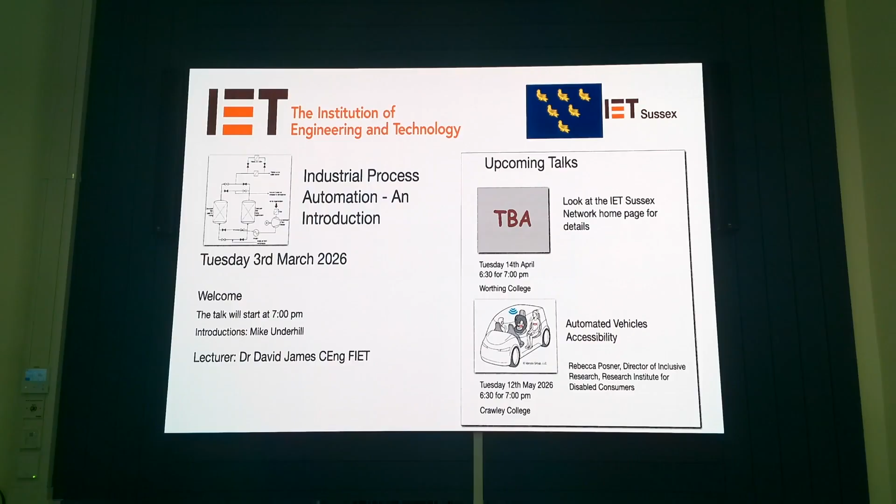My background wasn't quite as Mike described. As a physicist, I started my career working on the design of nuclear reactors for submarines. But every 2 years, the MOD changed their mind and cancelled the contract, and so we started on something fresh. So eventually I thought I'll go and work on the design of civil power stations, which I did. And after 2 years, you can guess what happened. The contract was cancelled, and we were about to start on something new. So that's when I moved into the area of industrial process control.

I've added to it a lot since then, but I'm afraid I chose this particular style of the book for that audience, and when I came to try and change it, it messed everything up. So I'm afraid you're going to have to put up with the page turning. It's just too complicated to change.

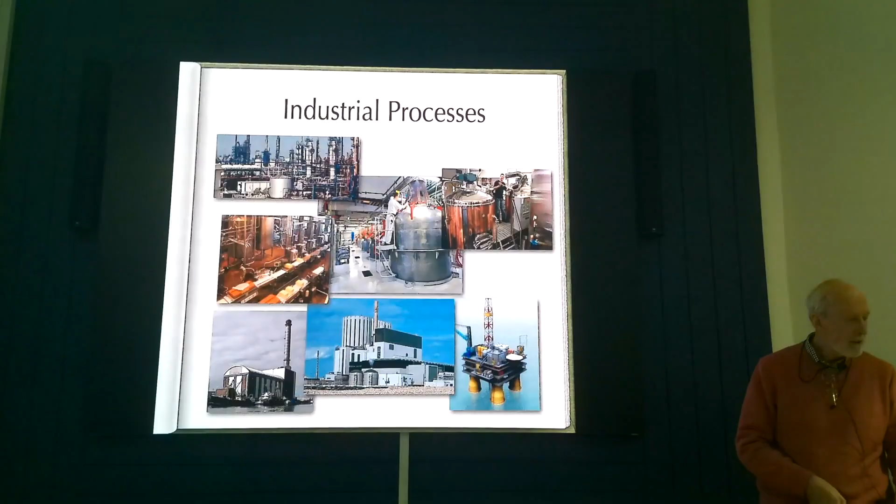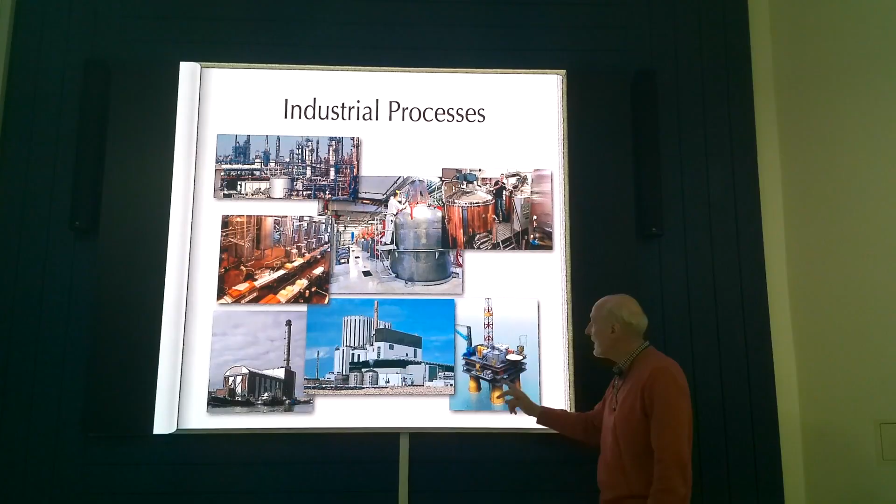Okay, industrial processes. Well, here we have a few. The red pointer is too small, I can't see it. But up the top there we have a refinery. This is a cheese manufacturing plant. That's a pharmaceutical plant, a brewery. Sometimes you do some quite useful or interesting projects. That's Shoreham Power Station, so that's a combined cycle gas turbine. That's a nuclear power station and obviously an offshore oil rig. They're all examples of industrial processes, but they basically fall into two classes.

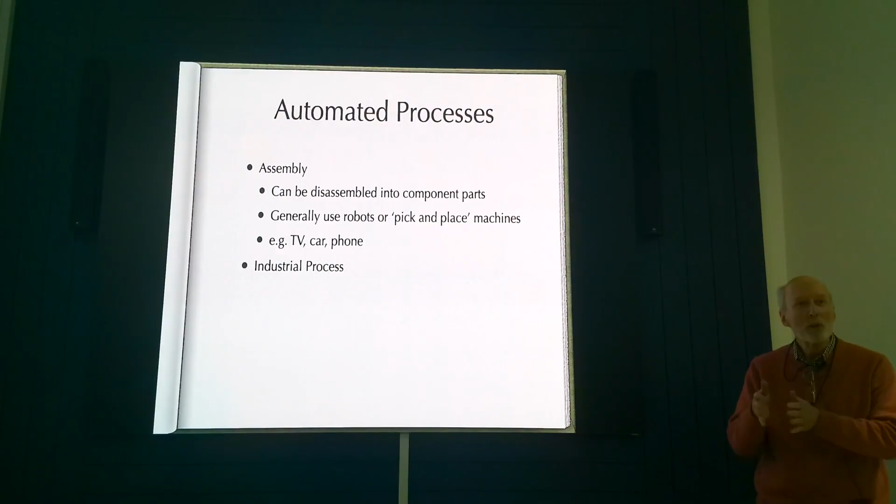There's what I've called assembly and an industrial process. So I just want to make it clear that an assembly is something that really can be disassembled. So if you think of a car or a phone, now, I know there's welding and there's glue and all sorts of things that make it difficult to take them apart, but in principle, the various components keep their sort of identity. And often robotics are used, particularly in the electronics manufacturing and other things.

An industrial process, however, can't easily be undone. Now, I know that making petrol in a refinery is really just breaking apart the various molecules that are already in there, and in principle they could be put back together. But what you do with all the additives and so on, I don't know.

Processes in an industrial sense tend to be fluids and powders that are piped around and mixed and react. So you've got chemical reactions, blending, separation processes, and so on. And there are a number of things, like almost everything we have here. These seats were the basic plastic before the moulding, and it was made in one of these processes. Similarly, medicines, petrol, and chemicals. So we've got those two different types, and it's the latter that we're going to concentrate on.

And just two examples of these processes. They generally break down into two types. There are the continuous processes, so they have a constant feed of material, and they really aim to maintain a steady state. Refineries are a good example. They want crude oil flowing through constantly. The only time they'll change is if they get a different source of material, a different type of oil, one that's heavier or lighter or has more sulfur or whatever, and they'll want to change the parameters. But generally, they want to keep it as steady and as efficient as possible.

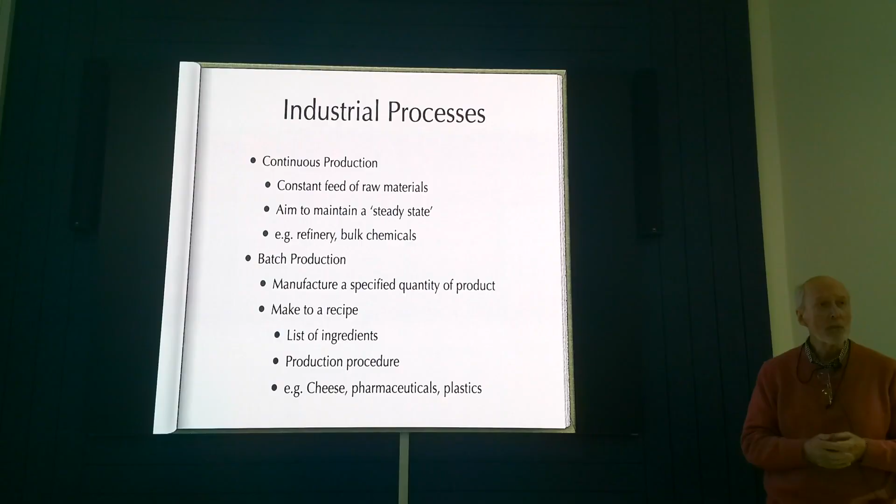And then there's batch processing, and that really is manufacturing a quantity of material, and usually requires a recipe with a list of ingredients and some production procedure. So cheese, for example, pharmaceuticals, the plastics, they're all batch processes, and there are quite different requirements for the two types of process plants.

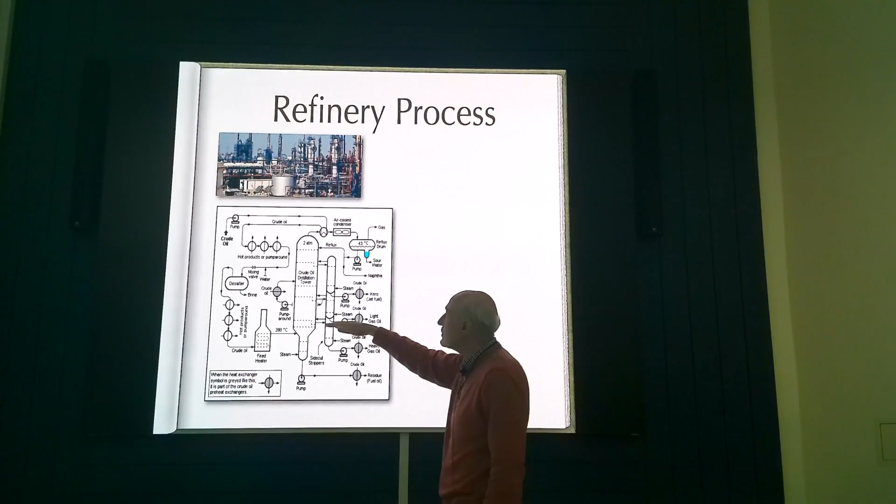If we take the refinery process as an example, you're probably all aware, it's a distillation column. Crude oil comes in, is processed in various ways. Steam comes in to heat it. And then the different fractions, different molecules that are within the crude oil, condense out at different temperatures. And so a whole set of grids allow the different materials to be taken off. And as I said, that's a continuous process with a constant feed of oil.

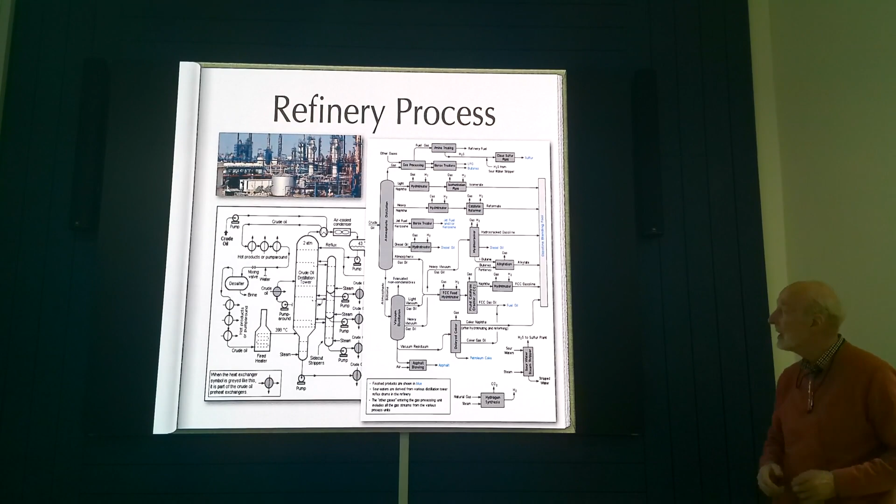A refinery process is just another example, just really to point out that in a refinery, there's lots of other bits and pieces, and not just the column. The column may be the most difficult part to control, but there's a whole load of other ancillary equipment that's required in the system.

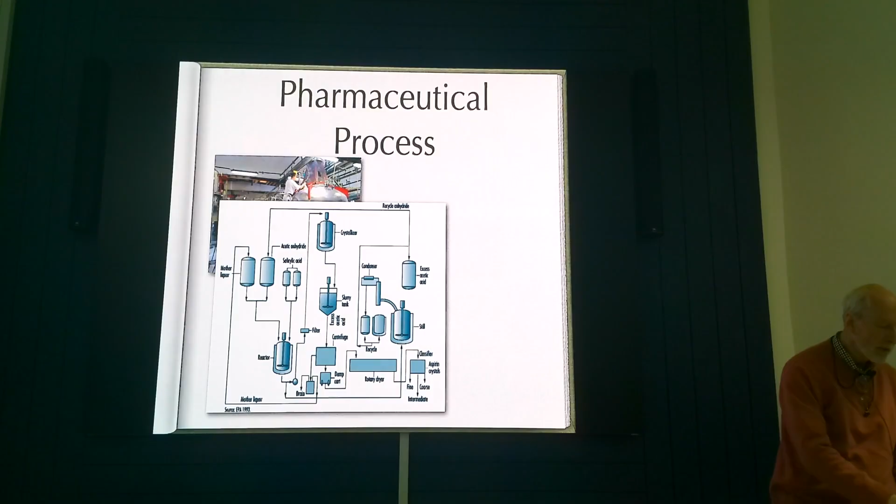That reactor, of course, is not just a vessel. It has, as we said, an agitator, but it's got steam and cooling water, nitrogen feed, because often materials need to be processed in an inert environment, particularly where there's the possibility of some electrical sparks, and various other valves and pumps associated with the vessel. So each of the vessels that are in a basic schematic then have much more detail associated with them.

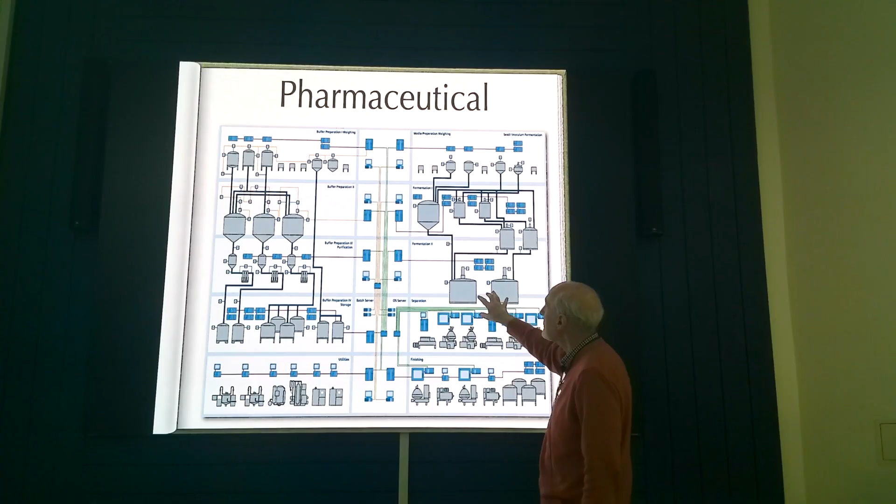And just as an example again of something a little more complex, here we have another pharmaceutical plant. There's 3 reactors in parallel, all being fed by the same set of tanks, and the materials then coming again through other equipment. This is the fermentation process. So they can become quite complicated. One recipe of a product can be used multiple times and running in parallel. So you often have parallel trains that all need to be managed.

So hopefully that's just given you a flavour of the types of industrial process, at least what I am referring to as an industrial process, and the sort of automation systems, therefore, that we're going to be talking about.

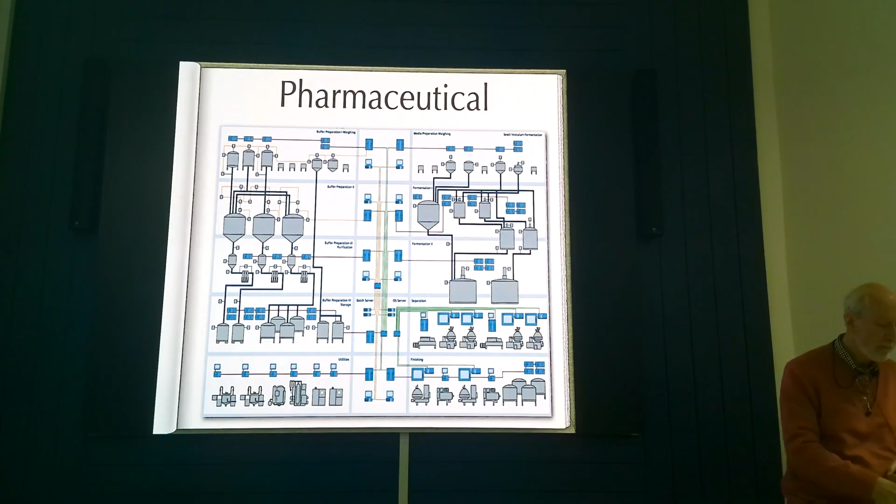To put all that together, there's a number of disciplines that are going to be involved. Now, I'm going to ignore things like architects and civil engineers who are going to build the buildings. I'm going to ignore the operations people who are making the product and the maintenance people who are going to keep the plant running. But to actually define and realize that plant, it usually starts with chemical engineers who will scale up lab scale experiments. They know the basic chemistry, but now they have to make it work for large quantities of material.

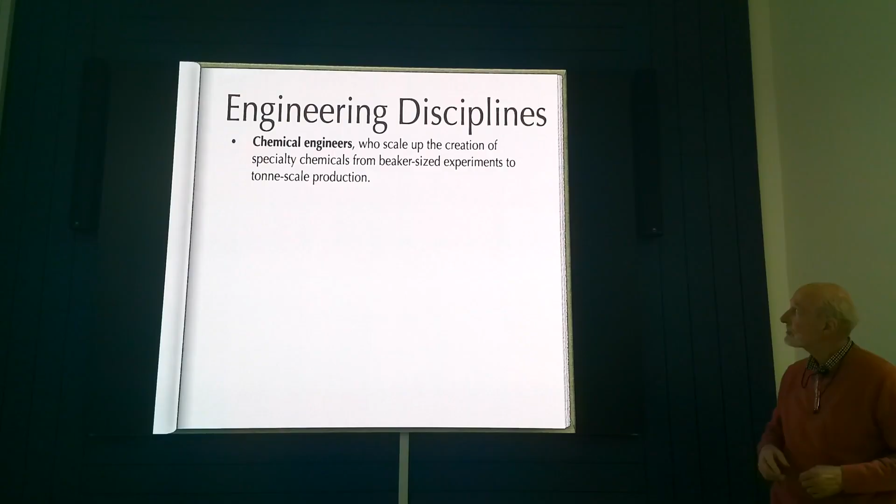There are then, of course, the process engineers, and they will start to say, okay, we have these requirements of the materials and what reactions we have to put in place. But now they look at the plant in a general form and do the basic top-level design, working out what vessels are required, what sort of functionality is required of those vessels, and providing that, as I said, that top-level design.

Mechanical engineers will come along and they'll design the more detailed arrangement. So they'll decide what materials are actually needed for that particular product. They'll decide where the pipes are going to run, how it's all going to be laid out, the physical structure of the system.

And the instrument engineers: we've got all these pipes and tanks and pumps and motors, but we need to measure lots of things. So all the instrumentation that's going to be required is sorted out by the instrument engineer. And of course, there's a sort of iterative process here. It doesn't all happen in steps.

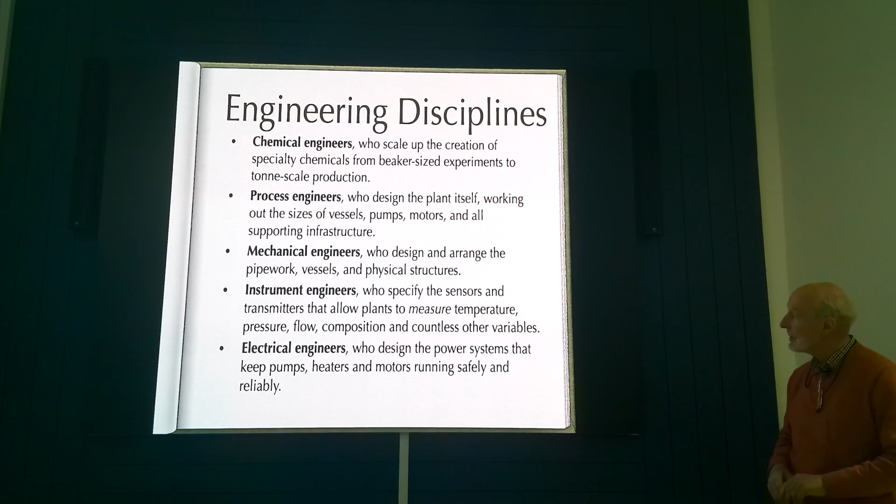But all that information, together with the one I'd forgotten, the electrical engineers, who are going to now work out, well, how are we going to power all these various things? Where are all the cables going to run? How do we make it a productive plant? And the information generated by these people is what's required by the automation engineer.

It would be nice if all these things happened and they were 100% complete before the automation team come in. That, of course, never happens. On the one hand, people try to do as much as they can in parallel. So from early information, they'll start developing the other systems that are going to be implemented.

And of course, there are always changes. People decide that, well, actually, we need another vessel here because we're not going to get the throughput. So they add in another one. We're not going to use on-off pumps, we're going to use variable speed pumps. Changes happen all the way through the process, and everyone involved there has to adapt and change what they've done.

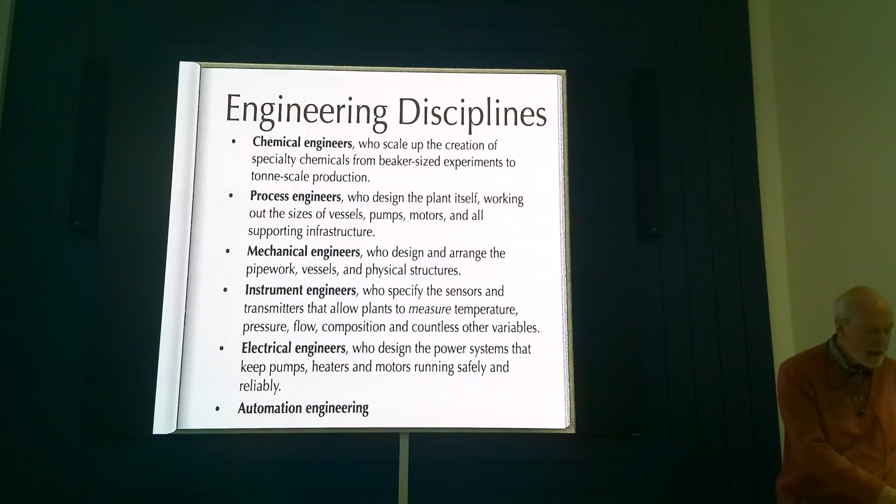Now, of course, all these people then provide a set of information that I've referred to as client data. So a process flow diagram, that's what a process engineer will produce. This is high level. So he's got a couple of tanks, he's got some valves. These are symbols that are used for valves. There's a heater, there's a compressor there, some filters at the top. So at top level, how the plant is structured and how it's going to be connected and how material is going to flow.

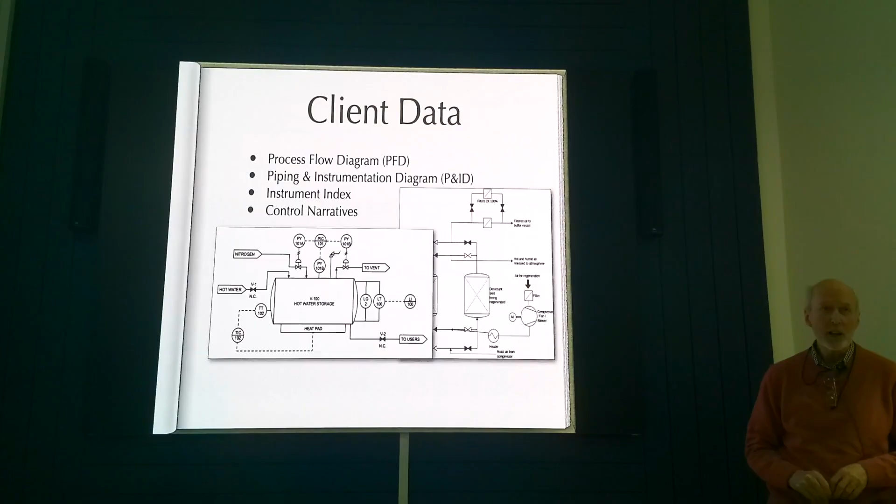The mechanical engineer and the instrument engineer are going to produce what's called a P&ID, a piping and instrumentation diagram. So now we're starting to get more detail. So we take one vessel, in this case just a tank, but now we have temperature measurements and temperature control. We have level transmitter and level indication, and so on. So they define all of the details of the instrumentation that's going to be on the plant.

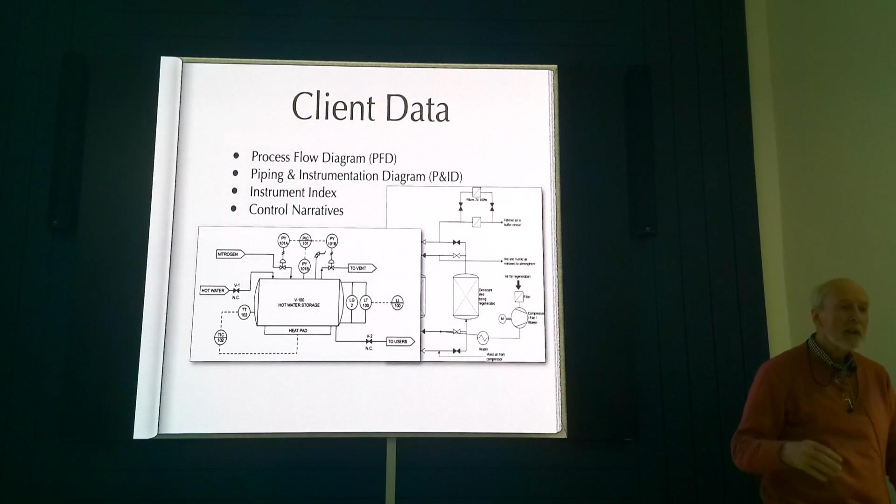There are also things that other people need. For example, for each pipe, it will say how angled it is from the horizontal, if some natural flow is required. The instrument engineer will also produce what's generally referred to as an instrument index. And basically for every transmitter, every valve, every device that's on the plant, they'll produce a database giving its reference number, its name, the type of device it is, its range, various parameters associated with it.

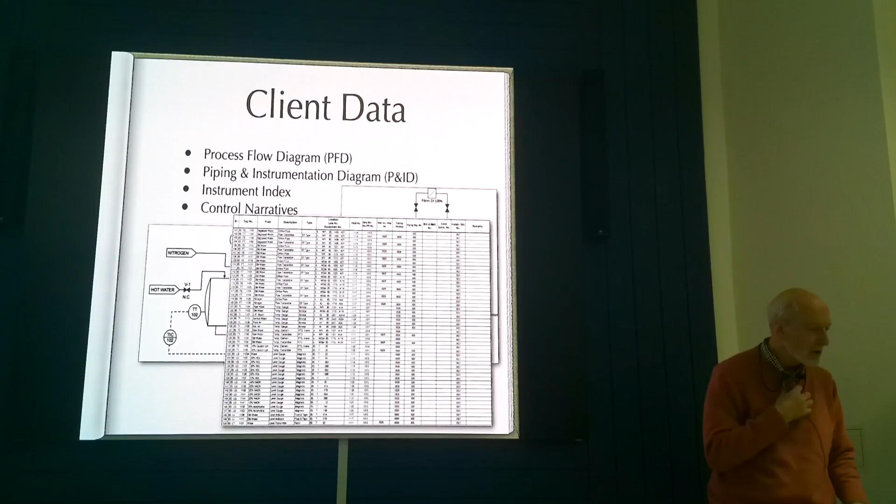So that when all this information is put together, together with some control narratives, which again are developed by the process engineers and the instrument engineers, then there's enough information for the automation system to be defined and implemented.

I thought it worthwhile just to put some of the acronyms up. I may use some, I may not, but you often find these. SCADA, the Supervisory Control and Data Acquisition. I guess they started when you had oil fields distributed around the desert. You needed to collect information from each wellhead, bring it back to a central point, and allow operators to view it and possibly change things.

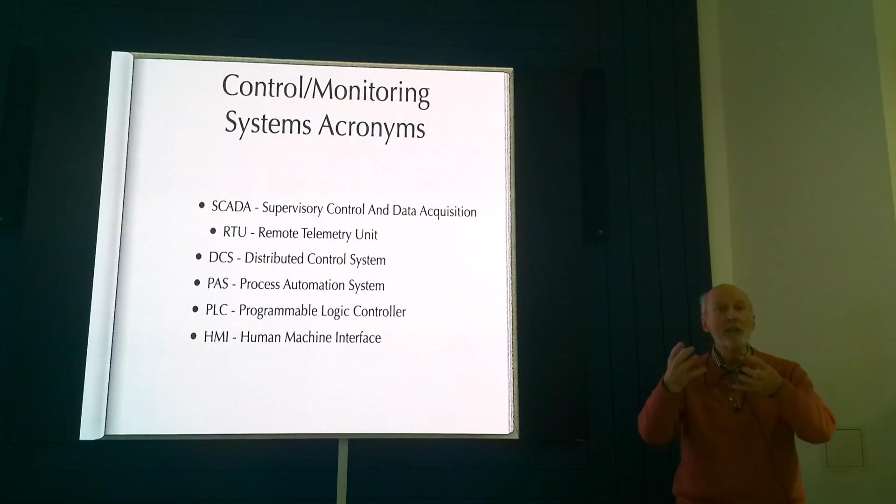So they have these remote telemetry units, just some electronics to read the analog and digital inputs, to drive some digital outputs, and then communicate over some sort of network to bring it all back to a central database and allow the operators to view that.

Distributed control systems are a tighter sort of system. Controllers based around the plants, again reading those input signals, sending output signals, and all communicating with each other. Remember, the RTUs are only communicating back to the SCADA database. So the distributed control system now is providing control across the board, and again providing data for analysis and a view by the operator.

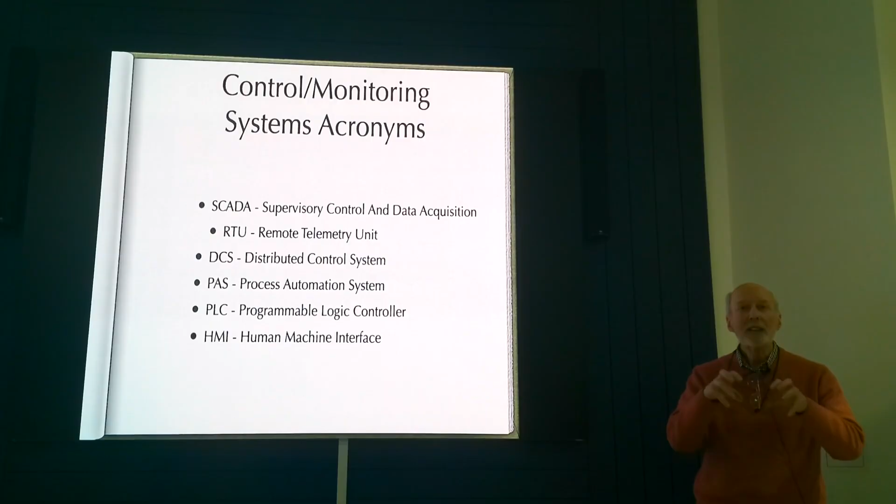A process automation system is an oddball, really. It's sort of rather like a distributed control system, but generally made up of more standard individual blocks that can be put together, often using devices that could be used in their own right, on their own, but now integrated into a system.

Programmable logic controllers - I don't know whether any of you have come across relay logic in your work somewhere, but the PLC was designed really to replace relay logic. Rather than have lots of relays all wired up so that if a push button's pressed, then various things happen, or if some alarm is produced from some part of the plant, then actions can be taken. Basically, they produced a system that would provide an electronic relay logic system.

These days, they're actually used more extensively, whereas it started off really just looking at a replacement for relay logic. Nowadays, a lot of people use them as the basic controller for a control system. And of course, human-machine interface - they all require some means of accessing or providing access to the information by operators and by engineers.

Okay, well, what I really want to do now is just talk about those sensors and actuators. The sensors are measuring things - temperature, flow, pressure, whatever. And the actuators are pieces of equipment on the plant that are going to change things - pumps, motors, valves, and so on. And in the middle, of course, you've got a control system that's going to read the inputs, make some decisions and drive the outputs.

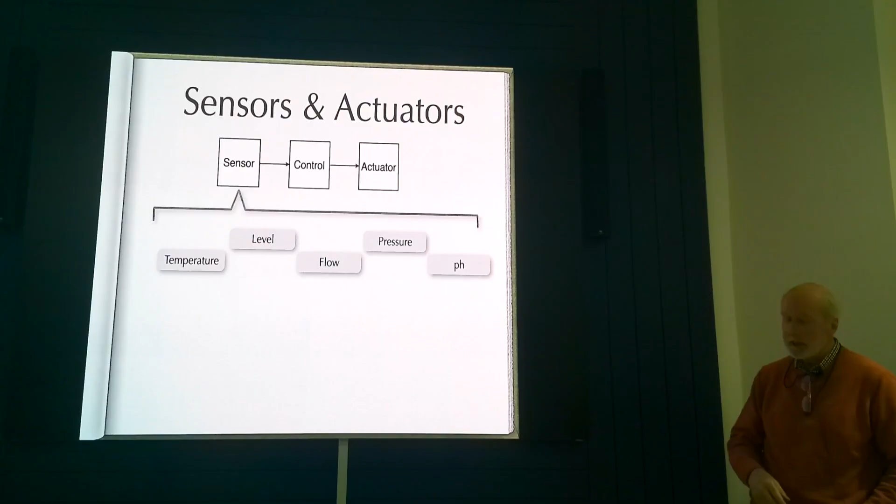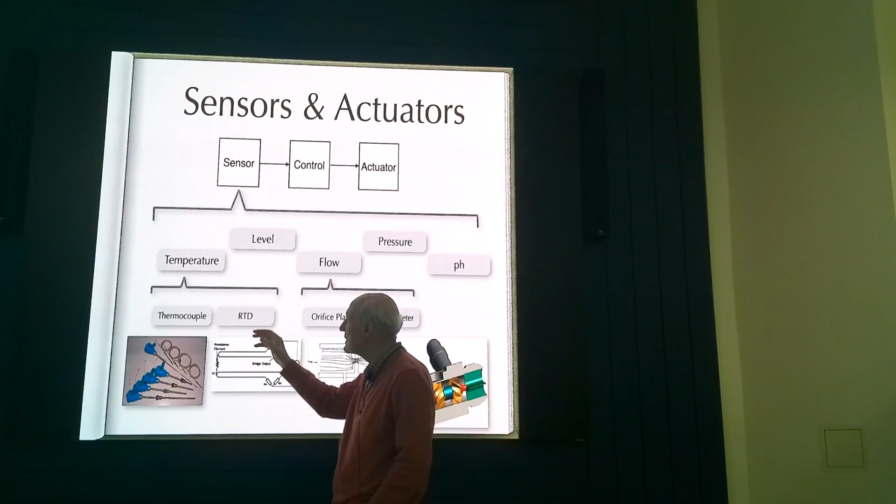Typically, the sensors cover - well, that's just an example. There are other types of measurements that take place as well. But if we look at temperature, for example, then usually, most commonly, it's either thermocouples or resistance thermometers. Thermocouples, as I'm sure you're aware, are two different bits of metal. They produce a small voltage depending upon temperature, and that small voltage can be measured and give an indication of temperature. Resistance thermometers - you could all think back to our Wheatstone bridges when we did A-level physics or whatever, but it's that sort of idea. A wire with resistance changes its resistance with temperature, so you can use that to measure it.

When we look at flow, two major types, although again there are others. If you pass fluid through a small hole, you get a pressure differential across there. If you measure that pressure differential and take the square root, it's proportional to the flow that's going through it, which is quite handy because they're often used then for measuring the flow of various materials. A more complicated item is a turbine meter, so it's rotating and you count the number of times it goes round to give a view of how much is flowing through. And some of these can be really accurate.

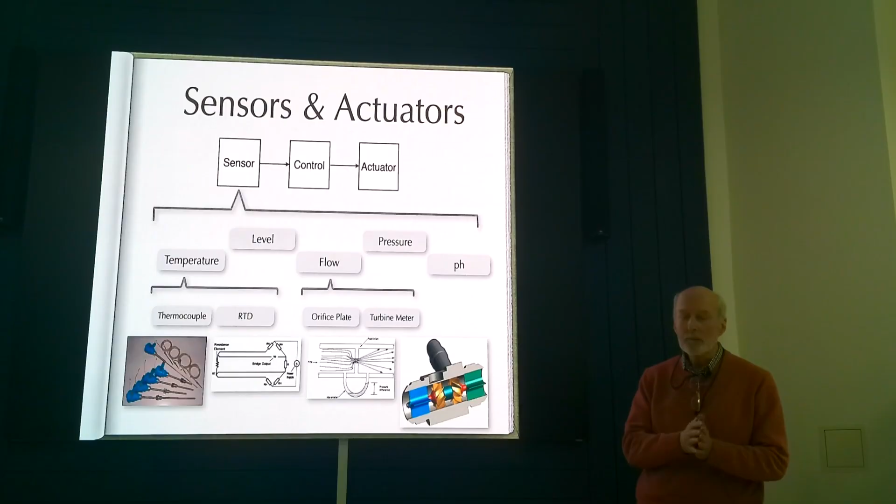Coming back to the oil field, I suppose wherever tax is going to be paid, they have to measure the amount of product that's produced very accurately. And great lengths are taken to have highly calibrated meters and controllers and test the flow meters periodically. There are other flow meters, for example, a positive displacement meter - fill up a volume and then empty it. Count how many volumes you fill up, that's how much fluid has gone past.

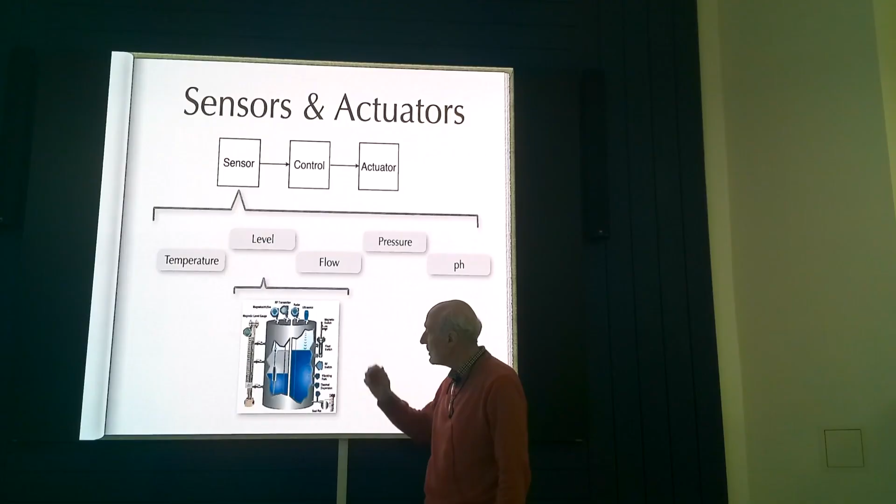If we look at one of the other types, level, as an example, there's a whole host of things. I mean, from a simple sight glass along the side, where an operator can go and look, to radar systems, to systems that go up and down and detect when they reach the surface. There's ultrasonics and various switches to show that the fluid has reached certain levels. So depending upon the application, there's a lot of choice for people as to what they can use for level transmitters.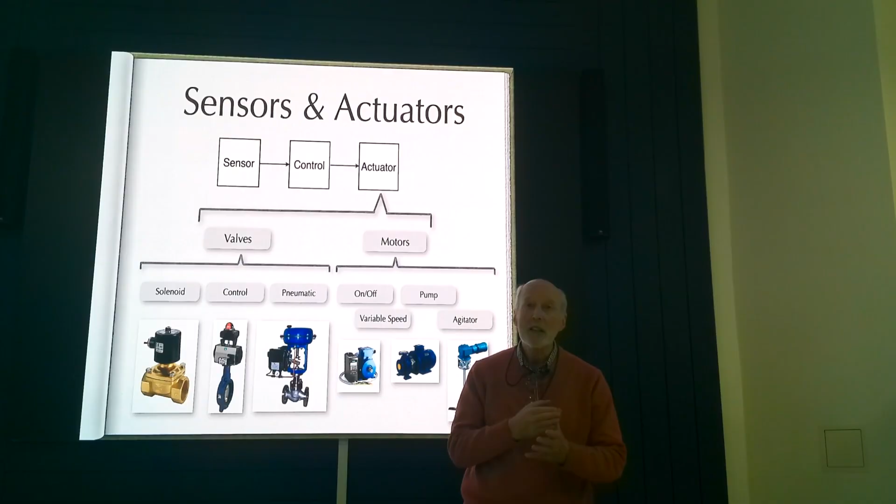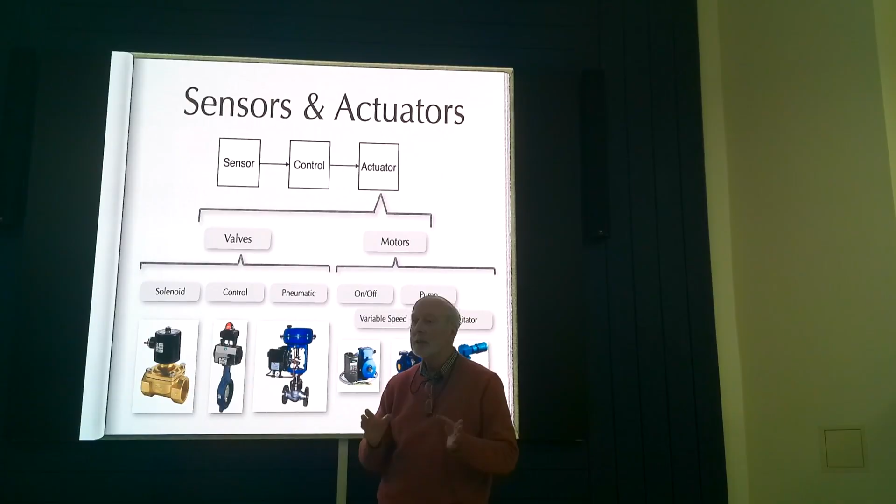With pumps, it's a similar sort of idea. You've got on-off pumps and variable speed pumps and a whole range of different types. Similarly, motors drive agitators or fans or whatever. So there's a whole collection of actuators that are used on the plant.

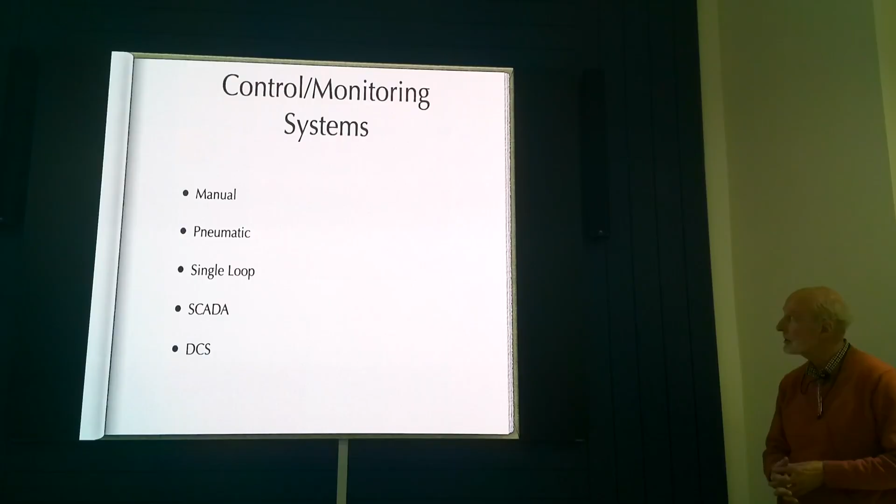Now to that box in the middle that's going to read those inputs and drive the outputs, you've got various types of control systems. Manual, of course - a man sat there turning the wheel and moving it. That was done for a long time. In fact, you may remember people talking of walking the panel. They'd walk up and down, looking at the gauges and the dials, and twiddle things as they went.

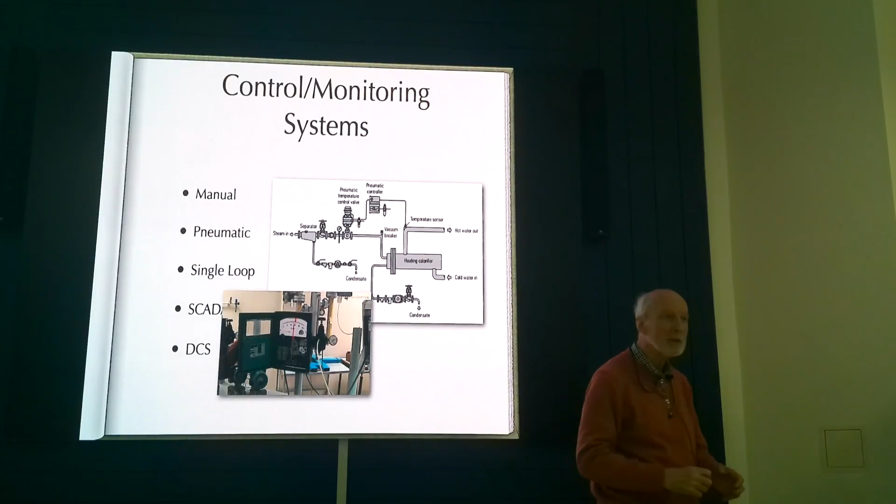Pneumatic systems - I've never actually worked on a pneumatic control system, but as well as having the pneumatics to drive the valves and so on, you can get controllers that allow you to do various things with the pneumatic system. You probably know more about those than I do.

If we look now at a single loop control, let's go back to something very simple: a tank with a temperature indicator and a valve that changes whatever we're passing through the jacket around the vessel, and a temperature indicating controller. That is a loop. We give the controller a set point, say we want the temperature to be this amount, and it measures it, looks for any error, opens or closes the valve to regulate the temperature of the jacket around it. That's single loop control, and probably 90%, perhaps more, of control on process plants is just single loop controls.

I'll talk a bit more about that in just a moment. They often get put into boxes that can be put onto panels. It just deals with that single loop, or some of them have multiple loops or multiple single loops.

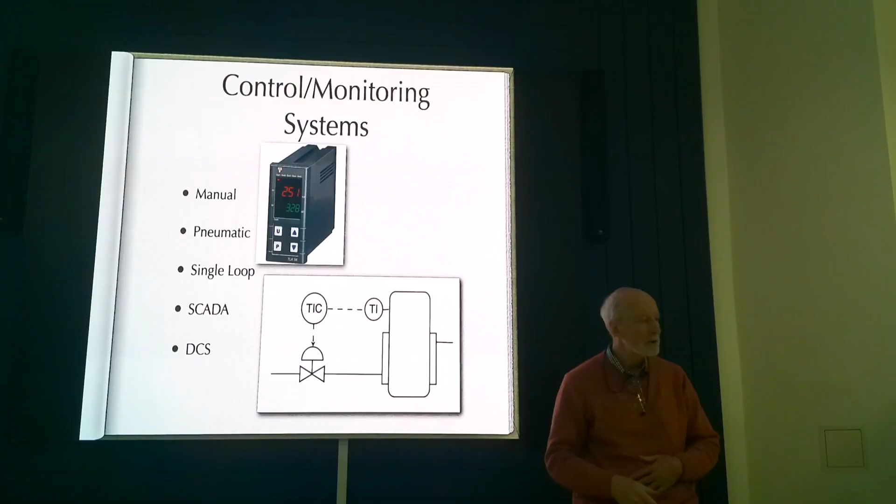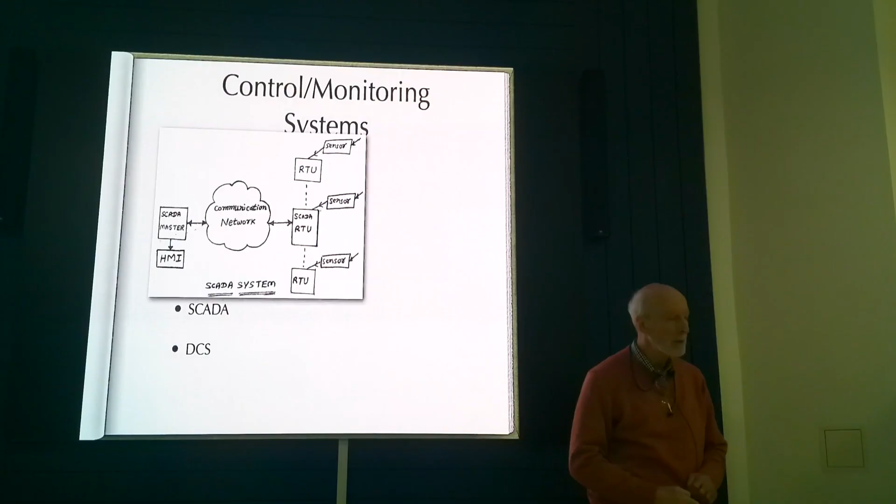We mentioned the SCADA system, this collection of remote telemetry units reading sensors and using some sort of communications network to send the signal back to the SCADA master and thus the HMI that the operators are going to use. A typical system might have these remote stations, these RTUs, using a communications network, which can vary - just a dial-up modem, a radio system, or hardwired cables. From some of the offshore platforms in the North Sea, they use tropospheric scatter to get signals back to shore. But then there's some device controlling the network, and a number of servers for the database and operator interfaces, and possibly some link into wider networks.

A typical signal from analogues, like a temperature or a pressure, will be a 4 to 20 milliamp signal. They've been used for years. It's 4 to 20 so that if it drops below 4, you know there's a problem - the wire's been cut or something. So that's been a standard for a long time.

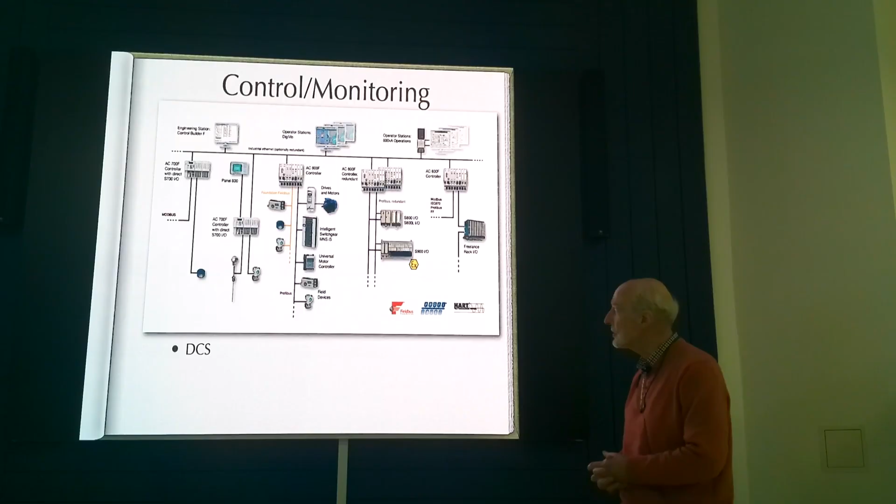These days it's tending to be supplanted with communication systems, so you hang all the devices off a communications bus, or a number of different buses, and do digital communication rather than the analog 4 to 20. But the communication system that's connected to all the controllers will also have other operator stations and database systems associated with it.

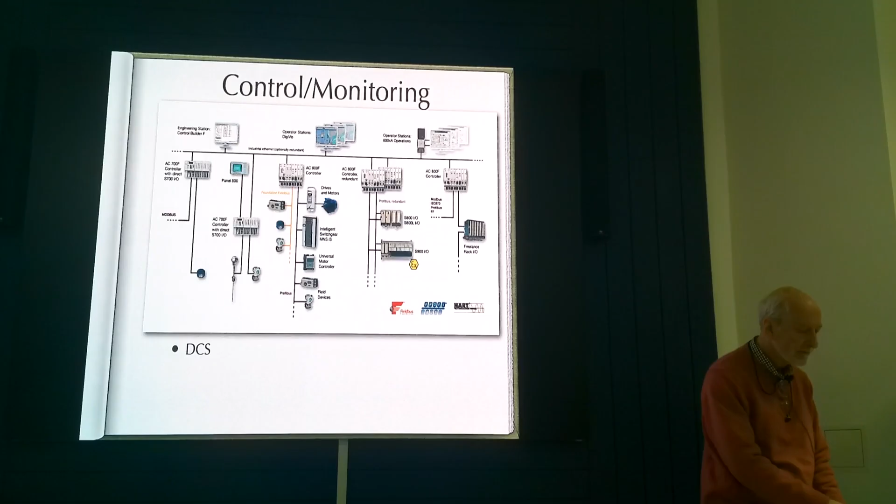Typically on those panels, they would record the history of information using a paper chart recorder, so a pen leaving an ink trace on the paper, which always runs out when you don't want it to.

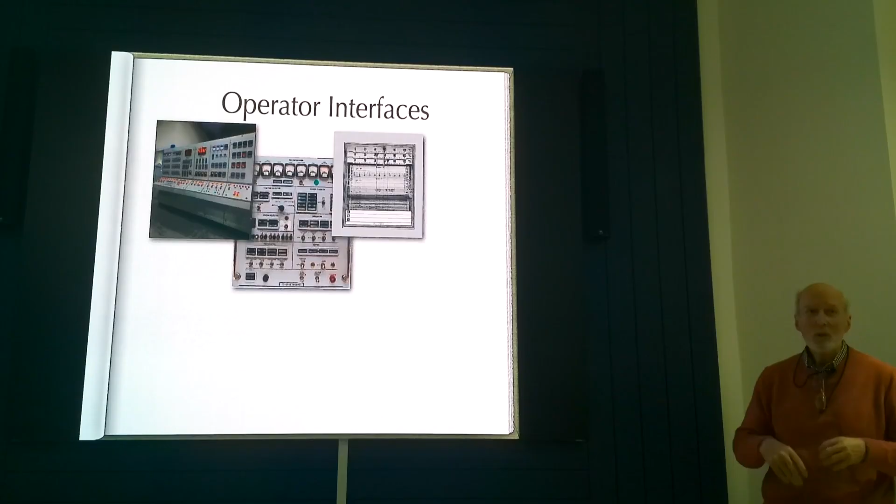But they, of course, were replaced by digital versions. So now in their panel they have some fancy graphic system that shows them how things are moving over time and allows them to recall data and do various operations on it. Much more versatile, but still to some extent fairly limited.

The operator screens themselves - now, when I started, we had characters that we would write onto the screen, and the character could be a block of a certain colour that, if we did enough of them, made up a pipeline, or it could be a line, or it could be text, but it was pretty rudimentary.

Then we went through a lot of development on graphical user interfaces, and people got carried away, and they produced garish things that they thought looked pretty, but were not necessarily as informative as they could be.

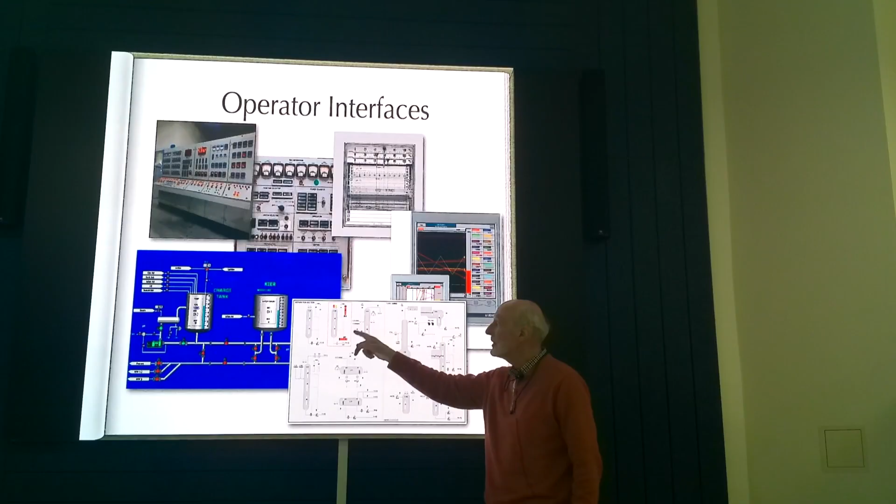More recently, people have decided that a basic operator interface should be boring. It should be boring and it should be grey, and it's only when something goes wrong that you start introducing colour, so as to alert the operator that something needs happening.

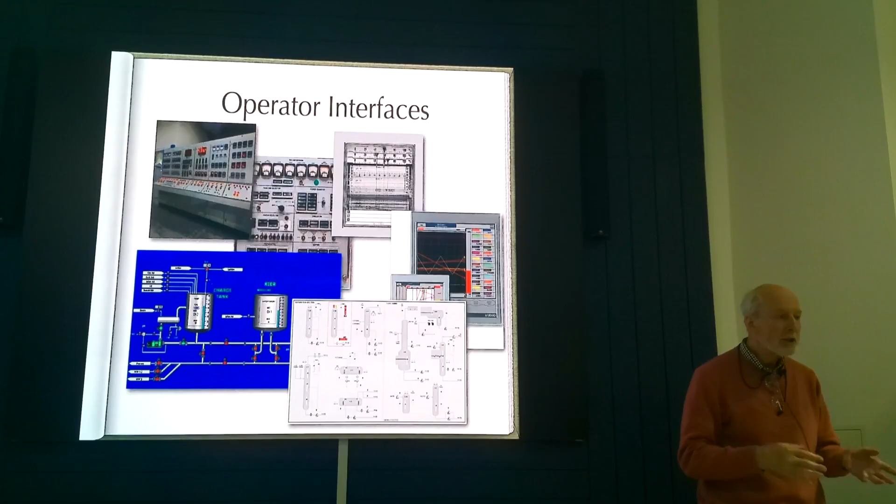That sort of alerting the operator is often done by using process alarms. It would often be the case of using annunciators, so a set of illuminated buttons with legends on them, and everything was well.

It was sort of grey or green or some suitable colour, and when things went wrong, the colour changed, it started flashing, the klaxon went off until you accepted it.

So that people can home in more easily. And although alarm displays are on almost every system, it tends to be by using the graphical interface that operators can decide really what's going on.

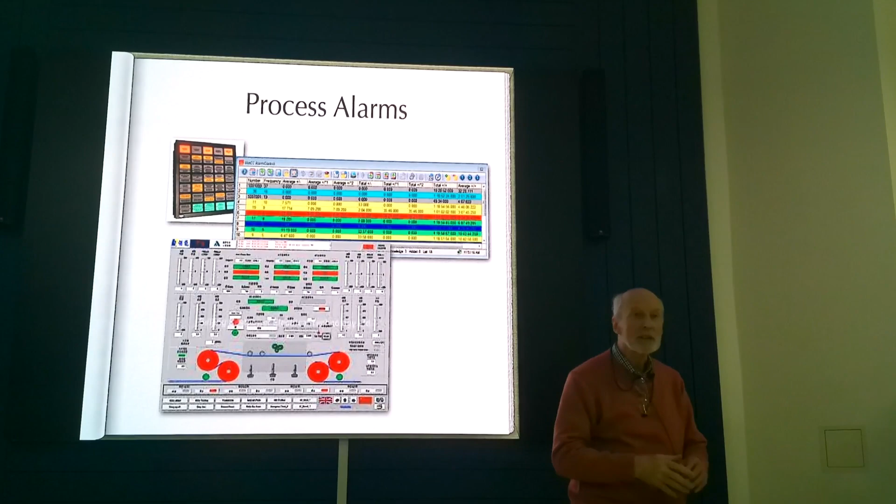Now, of course, these operator interfaces are usually put into control rooms, and it could be something as simple as a couple of screens, a keyboard and a mouse, and one operator sat there operating the plant.

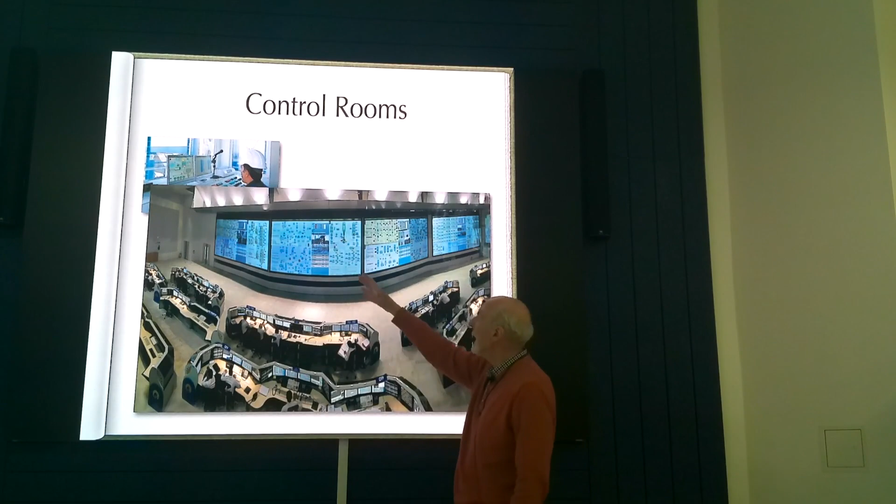On the other hand, it could be like this, which is from a refinery in Mumbai. So we have operator stations, a whole series of them, and we have wall displays that, if I remember correctly, were not actually as good a resolution as this screen here at the time that it was first installed, but that was some time ago.

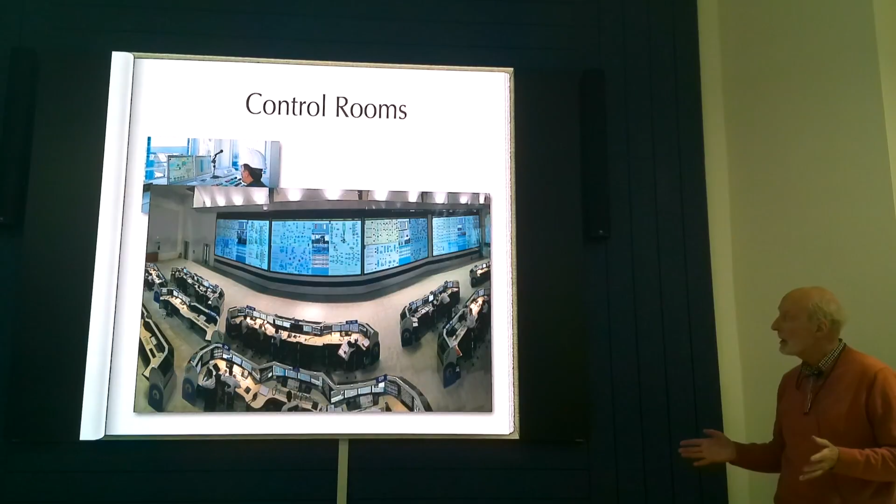So a whole range of operator interfaces, a whole range of how you put together a control room, and the number of hours spent deciding exactly what form of console was going to be used seemed to go on forever. No one could ever make up their mind.

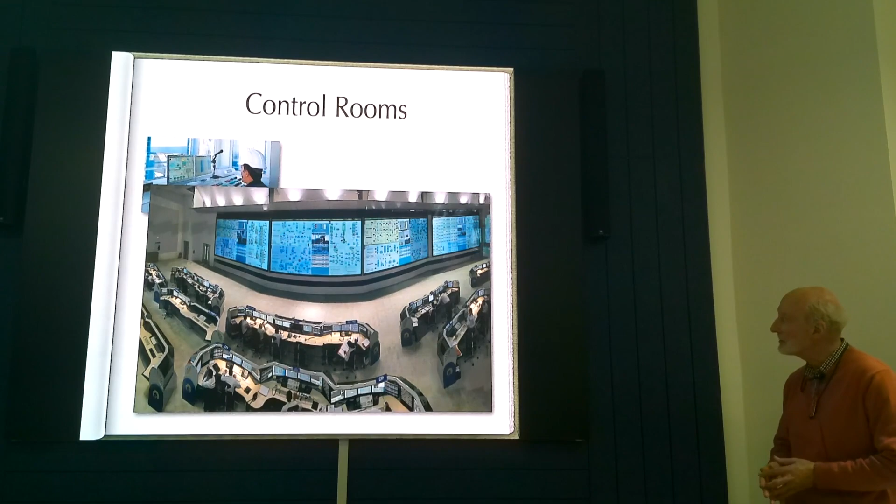So we've had a brief look at processes. We've looked at some of the engineering disciplines and the client data that they produce. When I say client, I'm talking from the automation engineer's point of view. We've examined a few of the sensors and actuators and some of the control and monitoring systems and operator interfaces.

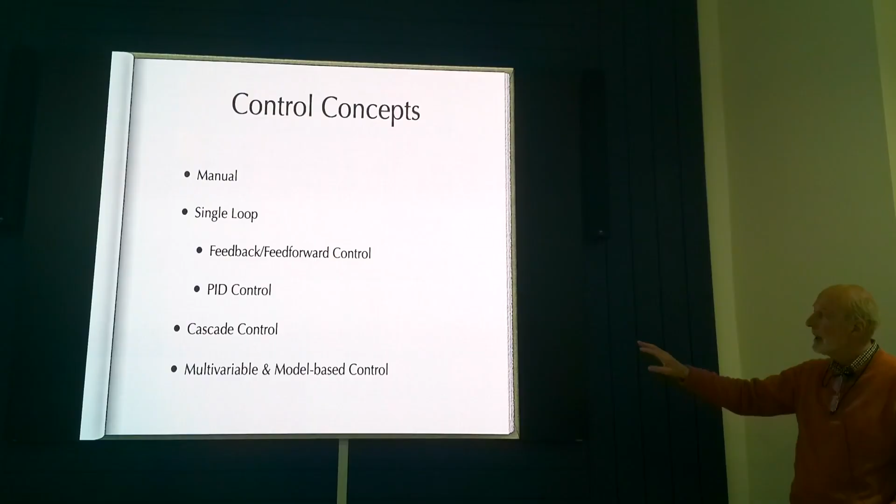I'd like to finally cover some of the concepts and schemes that are used in control systems, because so far all we've got is a set of boxes that are set up and wired into the plant. We have to implement some control. We looked at manual, and we've mentioned single loop control, which we'll look at again in a moment. And I want to introduce the idea of PID control, which I'll explain, and some other types of control.

So, single loop control, just as we described before, and in this case there's two loops. There's a level indicator and a controller operating an inlet valve, and there's a temperature controller, again operating the steam valves for the heating jacket.

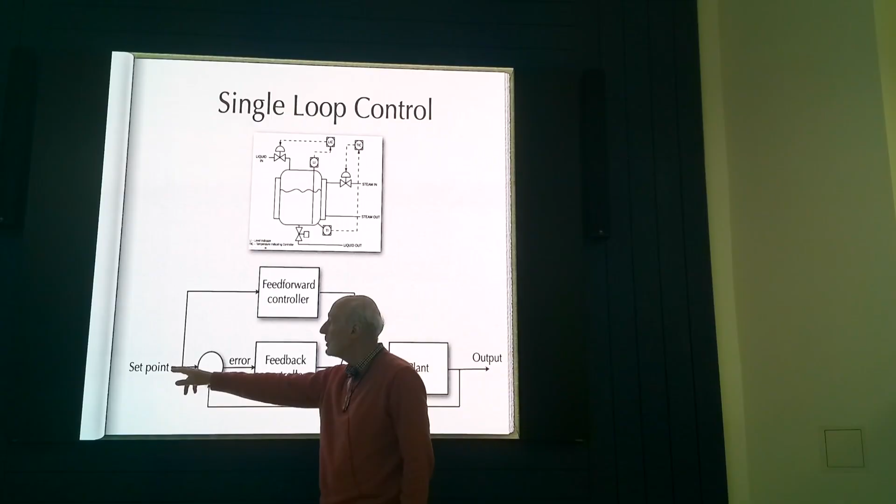And for each of those, the operator will set a set point, the target, what it wants it to go - what you set your thermostat to on the wall at home.

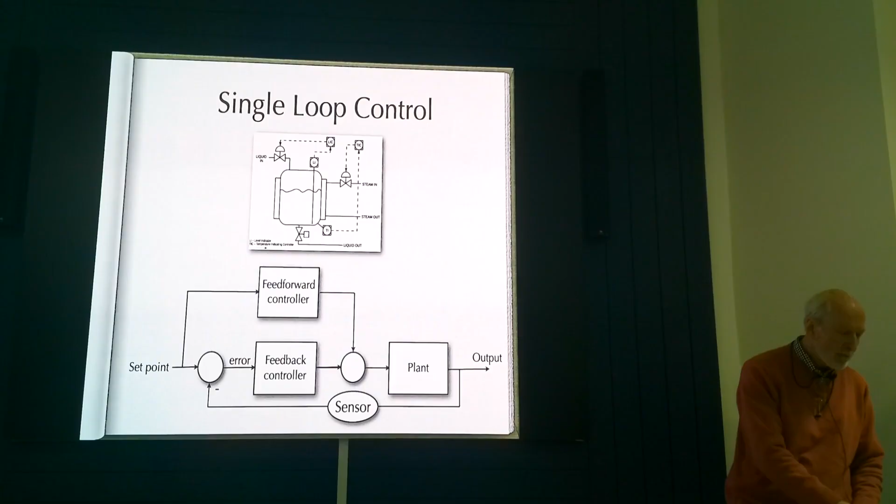Now, these single loop controllers tend almost invariably to be what's called PID control, proportional,

integral, derivative control. So it's basically saying that the change that I want, when I've got that error, the output I want to send to the plant is made up of three terms.

The proportional term: if the error is that big, then I send out a certain amount. If it's only that big, I send out less of a change to the plant.

The integral term says, well, if my error has been there for a long time, then I probably need to do something about it. So I want to look at the integral of that error and adjust the output that I'm going to send to the plant appropriately.

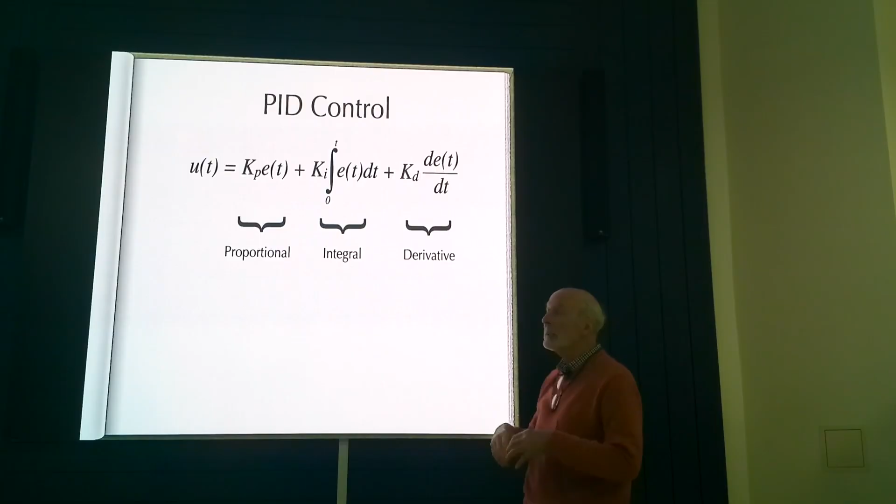And then the derivative, the rate of change. So if it's starting to change quite quickly, then I want to react quickly and increase the output that I'm sending to the plant. These three terms make up that PID control.

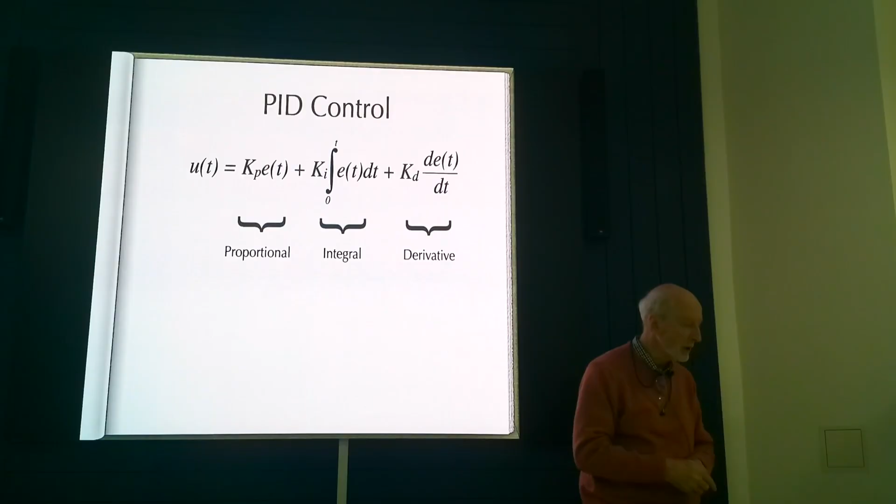And the K is then some factor that you can adjust so as to try and tune your loop. For example, if you choose different values, you will get different responses.

So if I'm asking for a step change, then depending upon the values that I enter for those constants, I will get different responses from the plant.

So if, for example, you can see the K for the proportional term there changing, then initially, depending upon the value, it will overshoot and oscillate.

And interestingly, it will never actually get to the point that you want if you just use that term.

If, however, you add a bit of integral control, now it's still got that oscillation, but it's brought us closer to the target value that we want

as the constant is being changed, the parameter is being changed.

And if you add some derivative control, then if you choose your parameters right, you can get something that is very close to what you actually want, that step change.

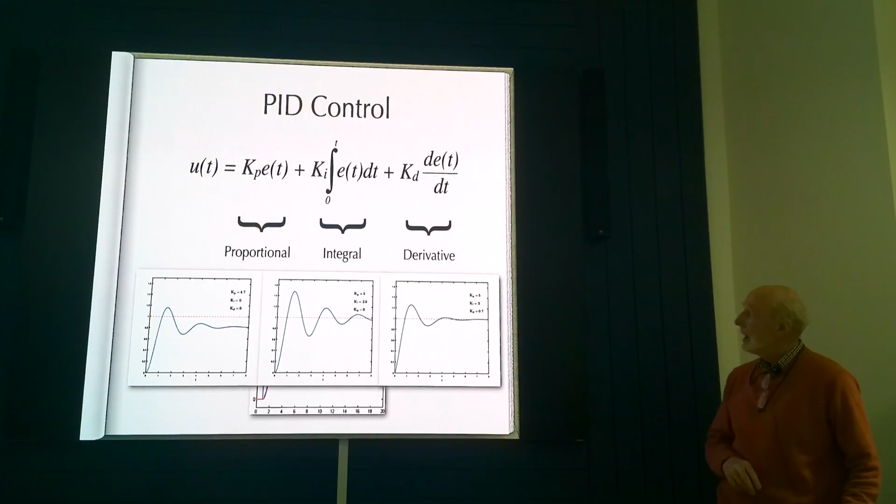We have one control loop providing the set point for another loop. And that's used quite often in the systems.

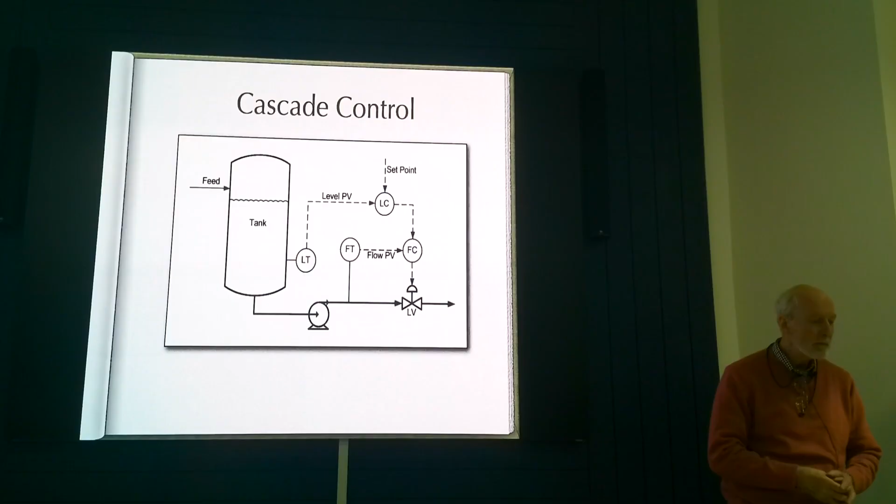There are other types of control that are less frequently used. Multivariable control, where there's more than one parameter that you want to take into account.

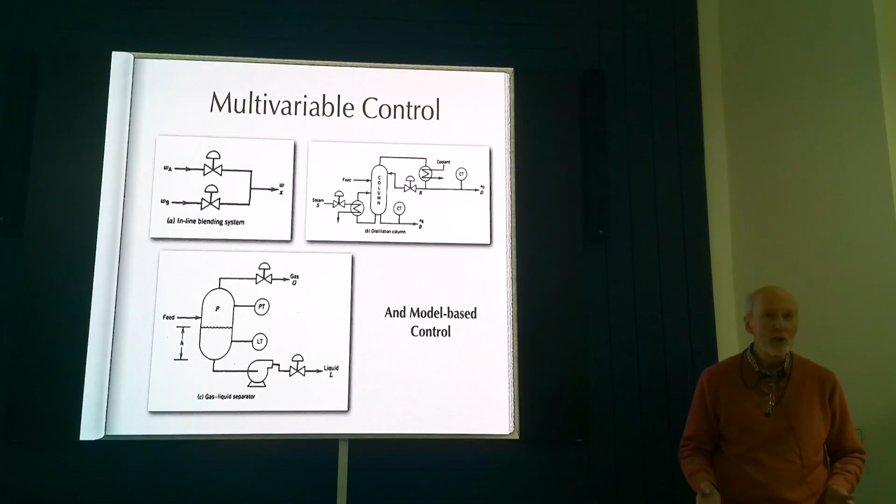And there are generally what are referred to as model-based controls. So you're taking the physics and trying to model what's happening using the values and using that model to adjust your control.

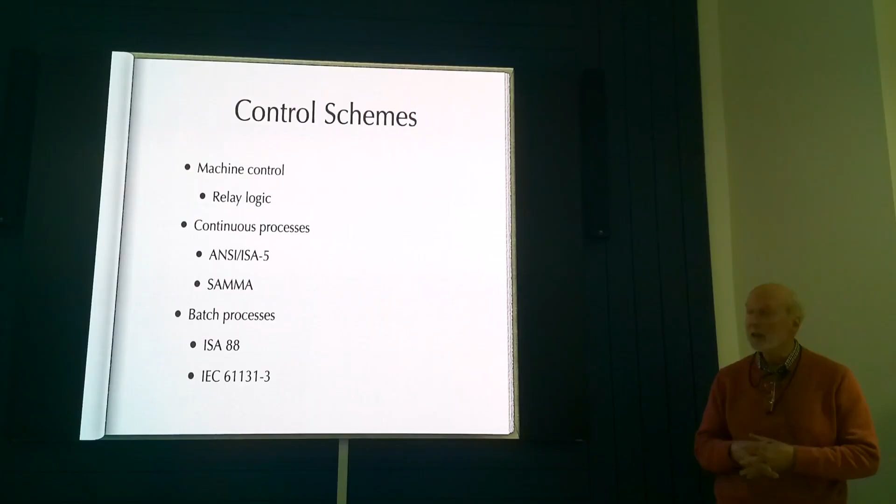So having all the hardware and having, in theory, how you're going to control various parts of the plant, that's all very well. But now we need to look at how that is implemented, how that's defined and implemented within a system.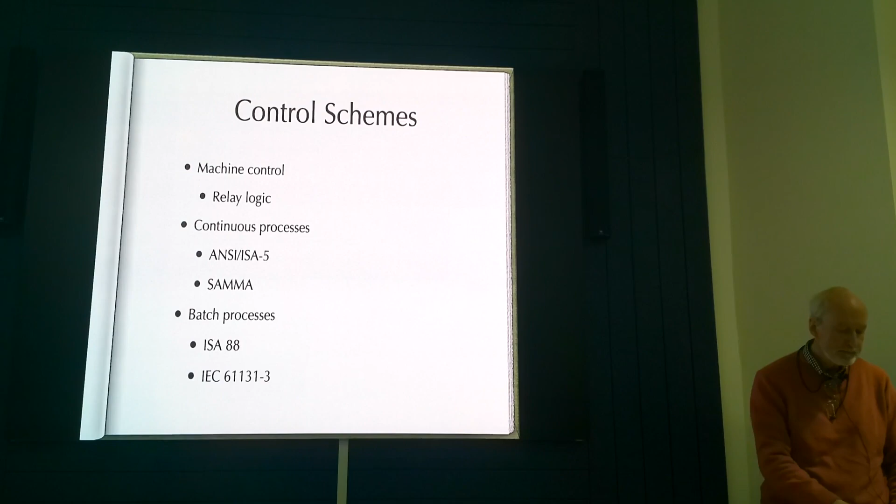We've mentioned relay logic, and there's a very simple example. If someone presses the start button and these valves are in a certain state, then some motor will be driven, or whatever. Basically, you've got a power rail on the left and a ground rail on the right, and if power goes through, then some action will be taken, which was basically how a physical relay system worked. It's just a software implementation of that.

And that's often used, as I say, on machine control. So a bottling plant, or we have a supply, we've made our Coca-Cola and we're going into the bottling area, and the bottling area will often use relay logic to control the operations. One advantage they have is that they can operate pretty quickly. They're limited in the complexity of what they're doing, but they can have a very fast cycle time, so fast-moving machines lend themselves to that sort of implementation.

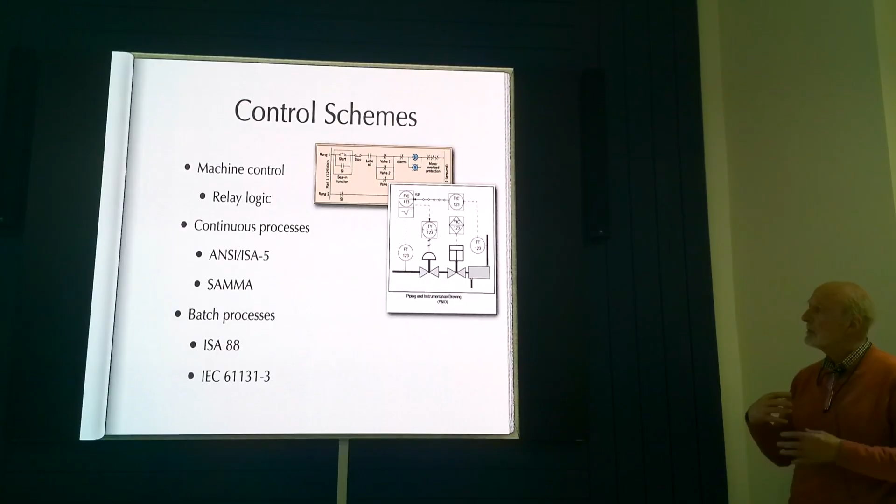When it comes to continuous processes, there are two sort of standards that are used to specify what's required. I've used this sort of terminology, this sort of notation on other diagrams. This is an ISA standard, so a temperature transmitter, with a square box around it, is a temperature controller. The I means indicating. A flow controller, well, this is probably an orifice plate because it's got a square root sign there. A control valve, an on-off valve, something that's open or closed. Actually, with the Y there, it probably indicates that it's a safety valve. So the majority of process plants tend to have their definition made using that sort of notation.

So on those P&IDs, the piping and instrumentation diagrams, there'll be that notation used. The other notation is SAMA. As far as I've come across, I've only seen it used in the power industry. It may be used elsewhere, but I've only seen it in the power industry. But it's the same sort of idea. We've got the field with its transmitters, we've got the field with its outputs, and in the middle we have, in this case, a PID block, square root coming in, and the output being driven into the field. So again, a type of notation that is used by the process engineer and the instrument engineer to define what control needs to be implemented.

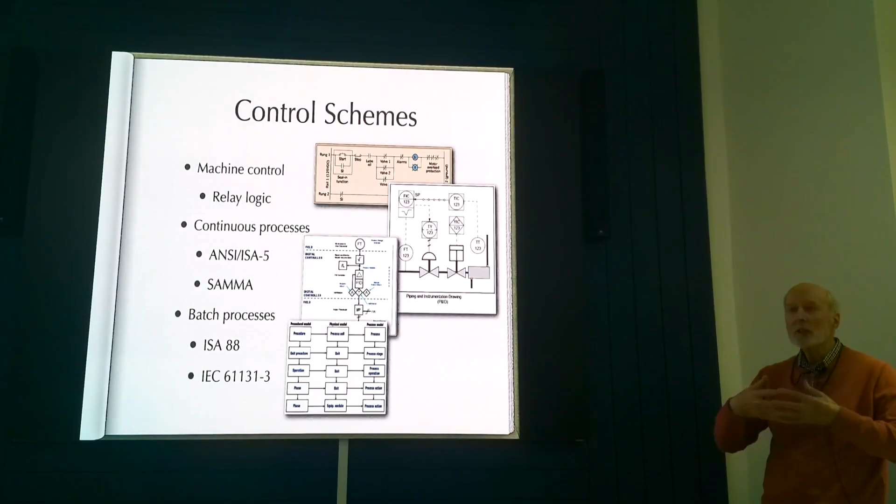Then we come to batch control. Now this is, as I said, batch processing and continuous processing share a lot of ways of operating and a way of defining things, but the batch process has another level of complexity on top.

You define your process as having a physical model of your process. You break it up, so a valve might be a control module. Several valves together operating will be an equipment module that will be defined. A number of control modules and equipment modules combined, usually around a major vessel, will be a plant unit. It's designed so that you can run a batch using a particular recipe on whichever unit you want, whichever unit is available that can operate in the way it wants to, without having it hardwired or hard-coded for that particular vessel.

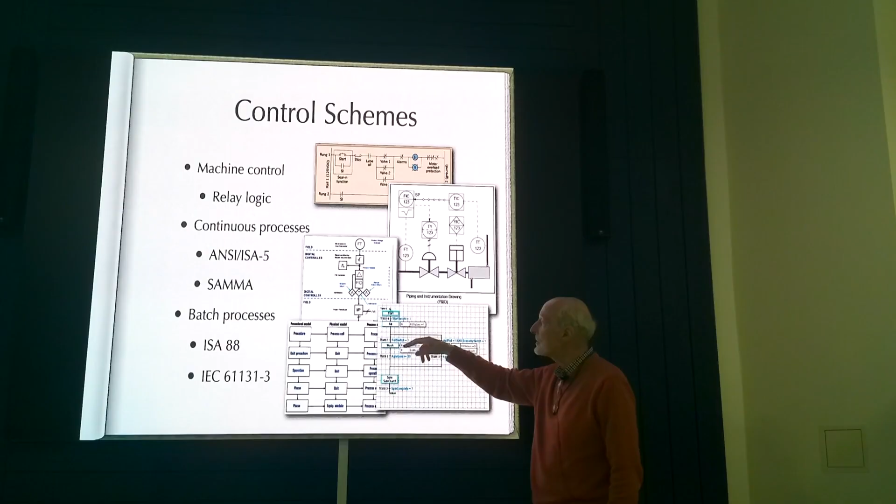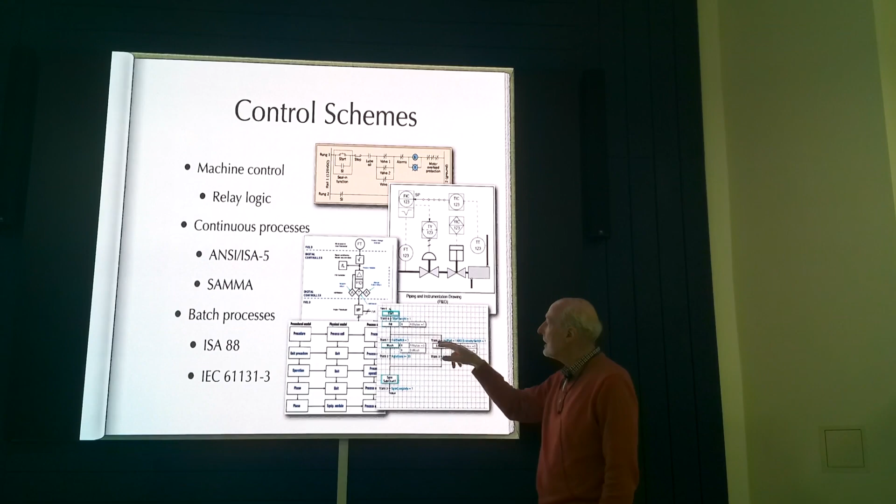The other standard that's mentioned here, as I said, the batch control ISA 88 is the sort of Bible for that. But there's also an IEC standard that says, well, how am I actually going to implement this control? This is an example of a sequential function chart. It's really just saying steps and transition. So it says from the start, if that transition is true, then I can go on and do the next operation. Here we have two transitions in parallel, each one will allow it to pass through. So steps and transitions, rather like a state diagram, but just a slightly different nomenclature.

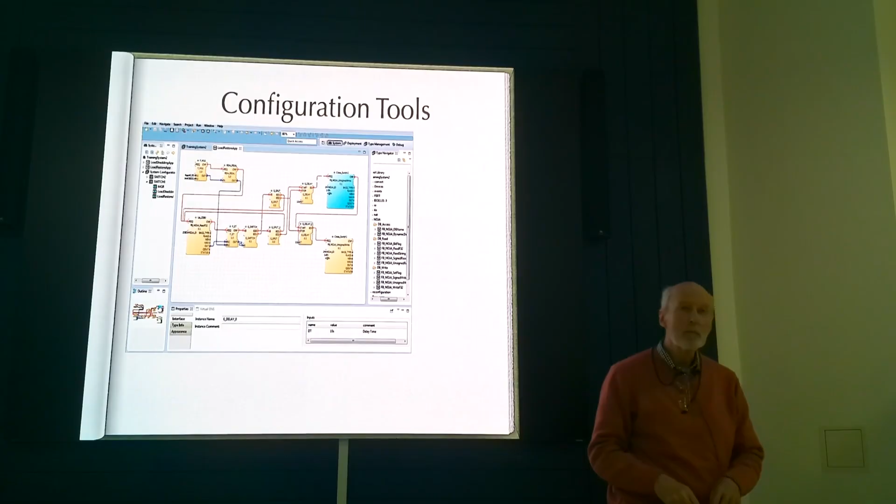And that's another type of configuration that's defined by IEC 61131, which is function block diagrams. So if you take an analog input, well, you need a piece of code that's going to read the value from the 4 to 20 milliamp signal, that's going to convert it into engineering units, that's going to perhaps do alarm checking on it, and then make it available to the rest of the system. So you'd have a function block, one of these, that has that functionality, and you can pull it off a standard function block, put it there, and connect it to your field and to other parts of the control system.

And this sort of function block diagram and the sequential function charts are very useful for engineers, particularly when trying to track down problems, and being able to look at the graphics and look at the associated block diagrams and documentation to see exactly what's happening, where signals are going, what is right, what is wrong.

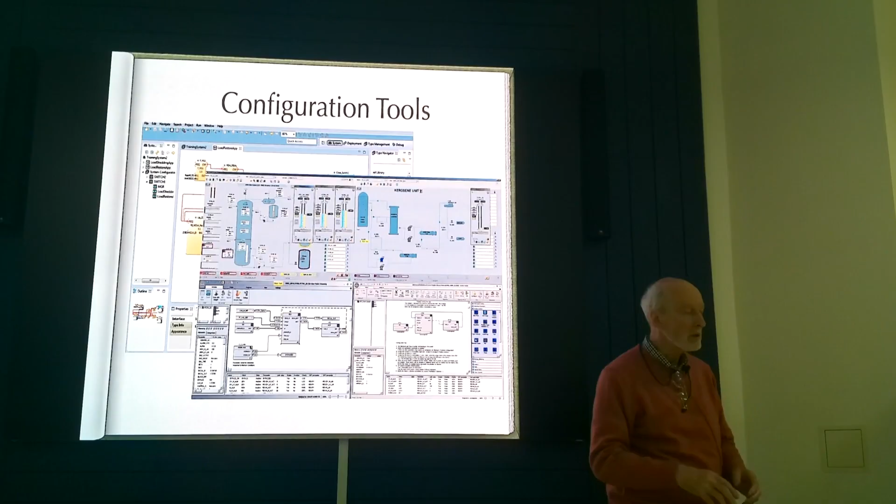The sequential function chart. What I described before, this is a tool that enables the engineer to build that set of steps of operation with the various transitions. And here one of the transitions is actually being defined in terms of some ladder logic. So they interoperate, they combine together to allow people to specify them, and people generally say configure. End users don't like you saying code. They don't want code. So configuring standard algorithms would be fine.

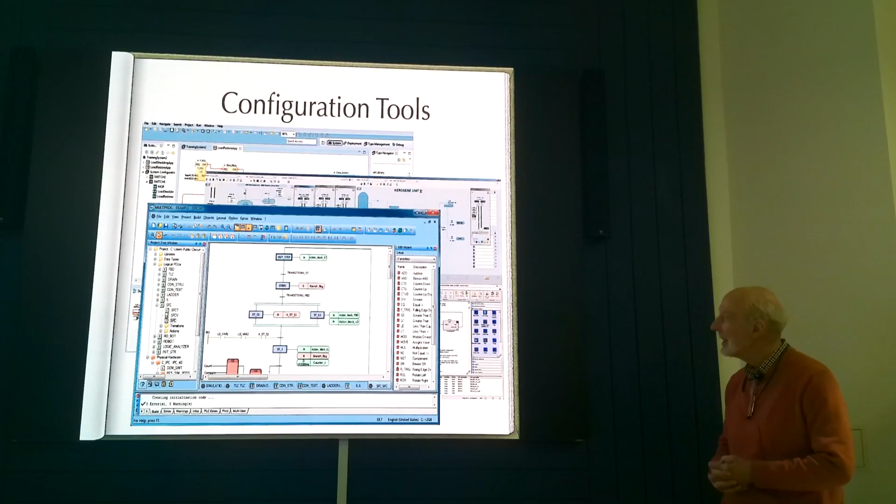And in fact, on the first system I worked on, we called them algorithms. These days, it's a term that is taught to our 5-year-old children when they're starting to look at computing, about an algorithm and what it means. We've been using it for 40-odd years in control systems.

As I mentioned, quite often we've got continuous type plants and we've had batch type plants, and quite often there needs to be a combination of the two. For example, on a cheese manufacturing plant that I worked on in Denmark, the milk comes in in batches, that's put in tanks, but it has to be pasteurized before it can be used. And the pasteurizer is a continuous process. You can't stop it. So you've got a batch plant making batches that are going to end up being converted into blocks of cheese, but with a little bit of continuous plant in the process. And so the appropriate buffering has to take place to be able to combine the two.

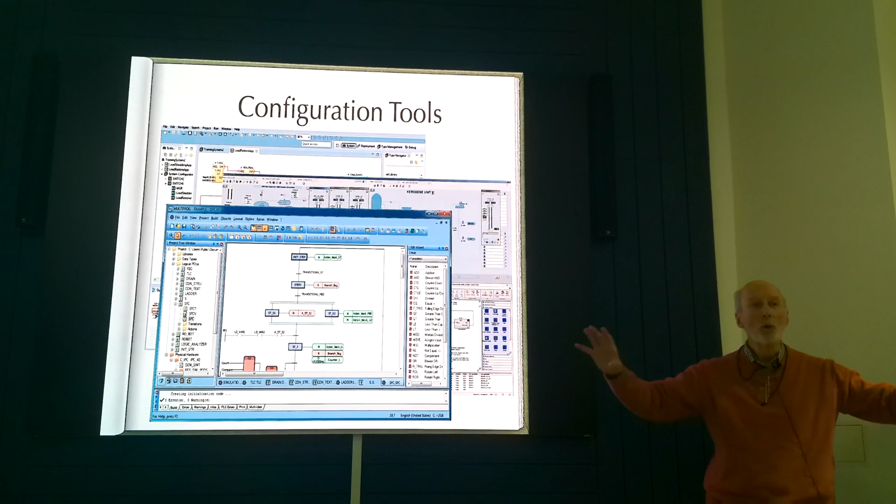Another example is, my boss one day called me in and said, would you like to go to Malaysia for a week? Oh, yes, I thought, I've not been to Malaysia. I'll go for that. It turned out that our Singapore office had sold a large control system for a petrochemical plant in Malaysia. What they hadn't realized until they had been given the order was in the middle of all these continuous processes, there were 3 batch processes, and they didn't have any experience with batch processes.

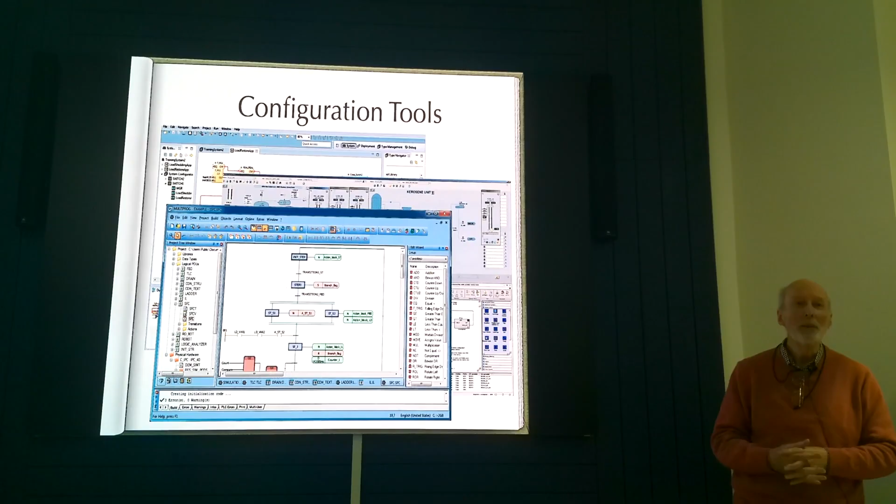Now, I should have realized that I couldn't do justice to the thing in a week. So 9 months later, I was still there. Luckily, then I was able to hand it over to another person with batch experience. But often people are caught out thinking that a batch control process is just like a continuous process, and it definitely isn't.

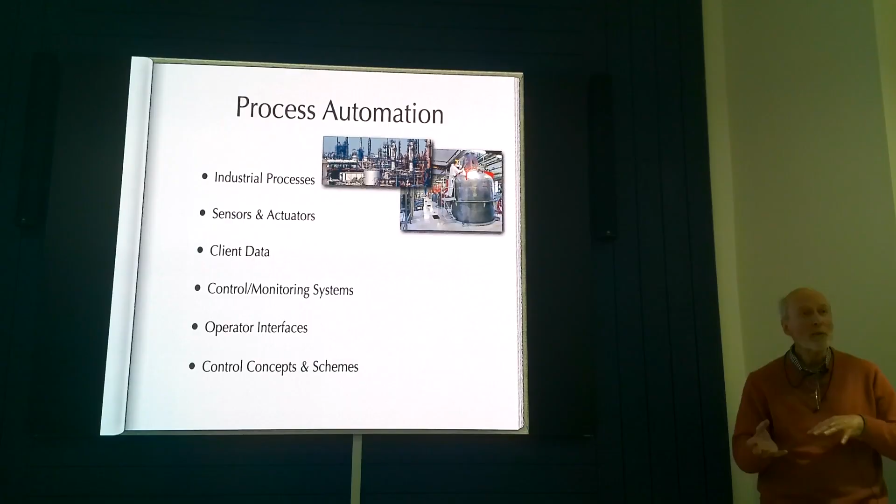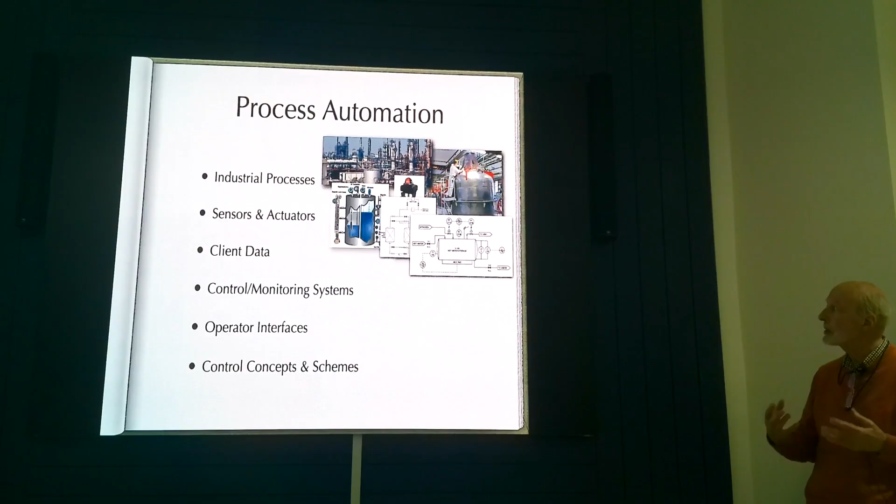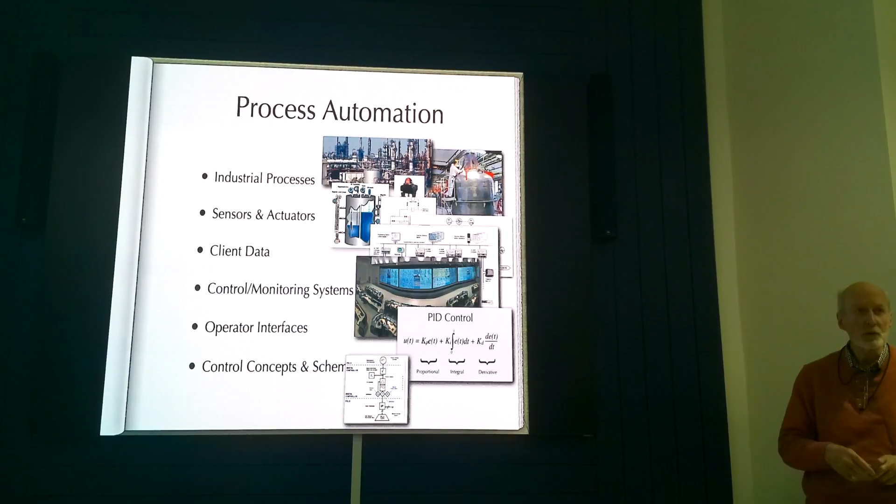Okay, configuration tools. So we've started by looking at industrial processes. Hopefully you have an idea of what I mean by industrial processes. We looked at the sensors and actuators. In between, we looked at the different disciplines of engineers that will be involved. We've looked at the collection of data that is put together to help define what the control and monitoring system is going to be all about and what it's going to do. And we've looked at some of the typical systems, at an overview level. We've looked at operator interfaces of the various types, very briefly. And we looked at some of the control concepts of PID loops and the standards that are used to define the type of control that's required on a plant.

Okay. I'm hoping that I've given you a bit of a flavour of industrial process control, process automation. It's a pity we didn't have more students here from the college who perhaps may have found out a little bit about what opportunities are open to them.

But okay. Questions? You mentioned batch processing as different from continuous processing. I was talking to some process engineers and I said batch processing, and they said, no, not batch processing, campaign processing. Has that got a very specific meaning? Yes, by batch processing, I mean the basic methodology. From a production point of view, they run campaigns. So it depends who you're talking to exactly. And it may be that in the 13 years since I've been retired, the terminology has matured a bit or changed. But yes, certainly campaigns. When I mentioned that ISA 88 standard, it talks of campaigns within a batch system. So yeah.